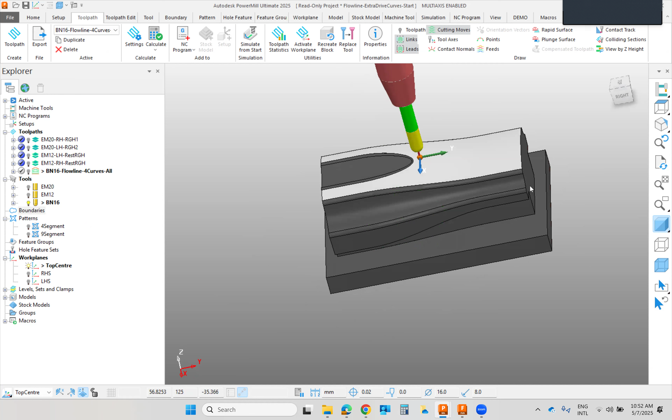First we need to extract the pattern. Pattern means the outer profile. First start profile and end profile, then center profile. Okay, what I will do, I will just select this outer profile and this one curve.

Then I'll go to pattern, create pattern, insert into model. Okay, now inside of this, I will make separately. Okay, see, we will make this first pattern, create pattern, insert into model.

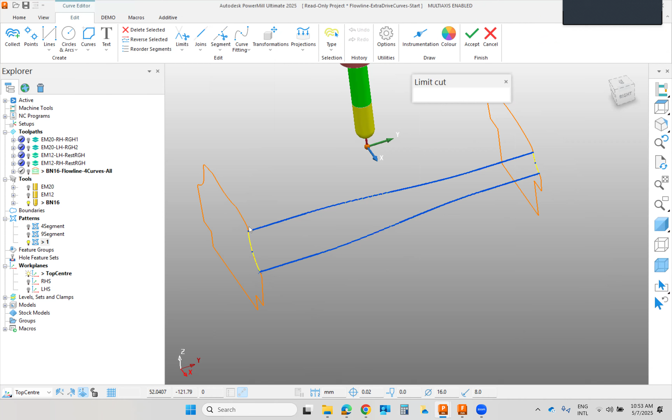But we need to edit this one. Go to edit, edit model pattern. Okay, go and you can cut it from this point and this one. Now I don't want this one. Just I will select and delete.

One start profile, one end profile, one center curve for this model. Okay, then I will accept.

You can see now, suppose I am going to do the 5-axis toolpath. What will happen? Having a multiple surface, I cannot make the toolpath. Right? Suppose I will go for any kind of surface finish or something, then it is only making the toolpath for single surface. Okay, we will not make for all the surfaces, right?

Now I'll go to flow line finish. Select this, and I need to select this pattern. What is the pattern number 1? And it should be shown as a valid.

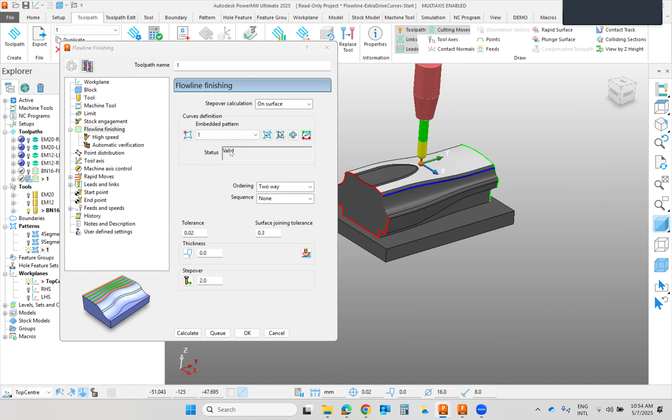Valid should be shown. Only if it shows valid, we can able to generate the tool path. Otherwise, this pattern is maybe not closed. You can see they having some error here.

Check this pattern again. Okay, they having 2 patterns. You can see, next I will try to delete one small chunk.

Now I will go to again toolpath and I will select this one. And now this is valid. And this red is indicate.

I will just click here. Red is indicate end profile. This is my start.

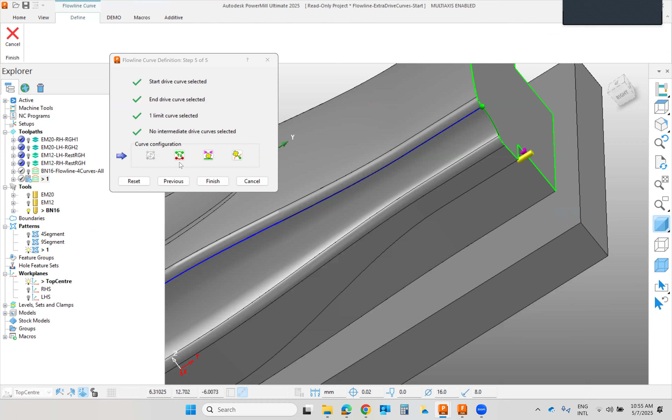Okay, and also here, it is asking we want to make toolpath inside or outside of this. Want to make outside. See, this is alternate, means this is the start profile. See the end profile, you can change also.

Okay, and this is cut direction. Up milling, down milling. And this is inner and outer. You want to make toolpath inside the curve or outside the curve. Okay, I am going to use now outside the curve.

Okay, now my tool is here. So now I will finish this. Now what will happen? It generated, selected the profile, I will change my tool axis, change my step.

And I will use the tool axis as a lead and lean. Okay, usually you are going to use vertical. You can see first one is lead and lean. And I can say having option called as contact normal.

This tool tip is always parallel to this surface. That is called as contact normal. Okay, I will use this as a contact normal. Vertical means the tool is always vertical. Okay, I will try to use contact normal.

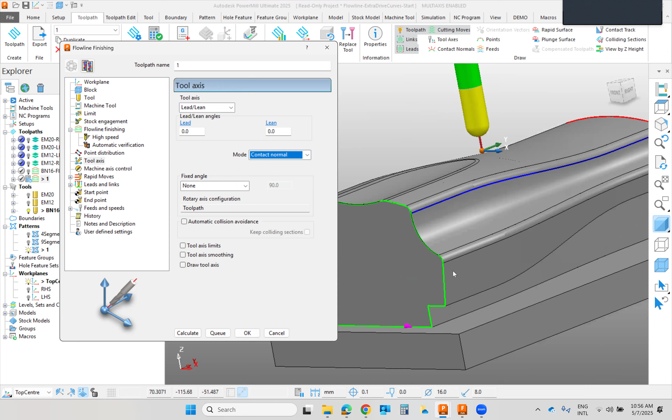Then my tool is trying to tilt on this side. Yes, parallel to surface. Always my surface is like this. The tool is always, when it is going, the tool is always adjusting. Okay, that is called as contact normal. And then I can say just calculate. Let us see how the toolpath is going to carry.

Okay, now, you don't expect the one-time toolpath in the 5-axis. You have to do some fine-tuning in the toolpath.

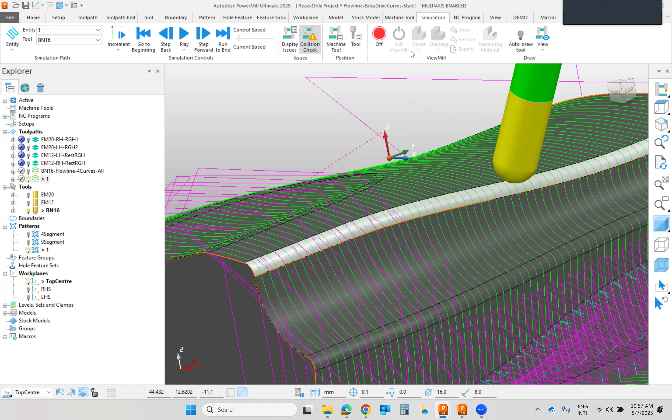You can see I have used this one, and this always contacts normal to this. I'll just turn off the lead and without it - why is it generating here also? Because we have taken the curve from the bottom of this. We need to restrict the curve, how much you want.

You can see here having one pattern curve created active. We can see the curve is created like this. That means I want to make toolpath only for this here.

What do I have to do for that? I'll just select this. Now I will select only this here. Now I will go to create pattern, insert into. Now you can see I got the closed curve.

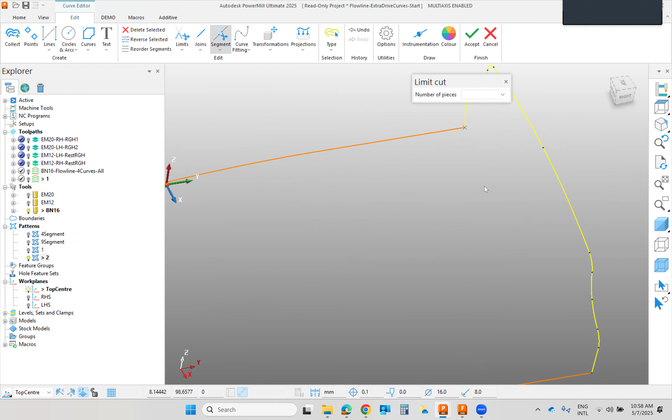See now, 0 closed, 4 open - means this is 1, 2, 3, and now I will go to the same toolpath, go to setting. Now I will change my pattern.

Now you can see this is also pattern. Now this is my start profile, this is my end profile, and this is follow. And also here having one-way and two-way.

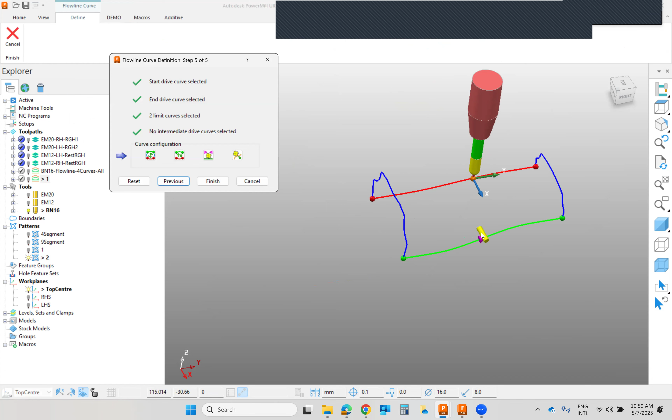Also you can see the toolpath is generating inside the surface. Then I can have here in-to-out way. Okay, I just mentioned carefully.

Now my toolpath is created. Now you can see tool is moving like this. And now making the toolpath, you can see.

Flow line or 3-axis is used. Any - that is the embedded pattern.

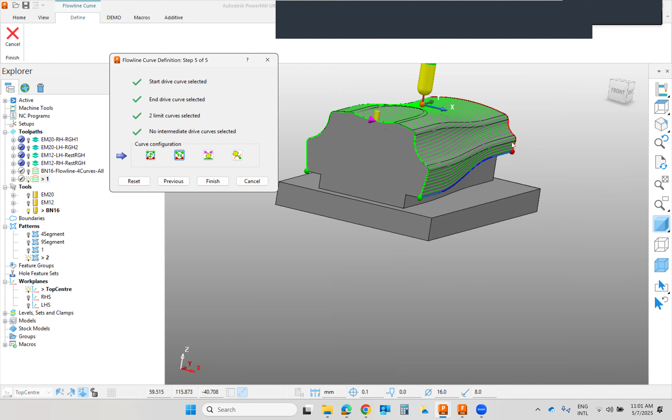See now, this is my start profile, this is my end profile, and this is my follow, and finish. Now check out. Okay, now my toolpath is generating - the complete profile is going to cover.

If you want to do like this, I can keep it as it was. Change one - just you can change it. You can see the color line, right? This, and this. Okay, so yeah.

So here you can go to edit. Here you can see this.

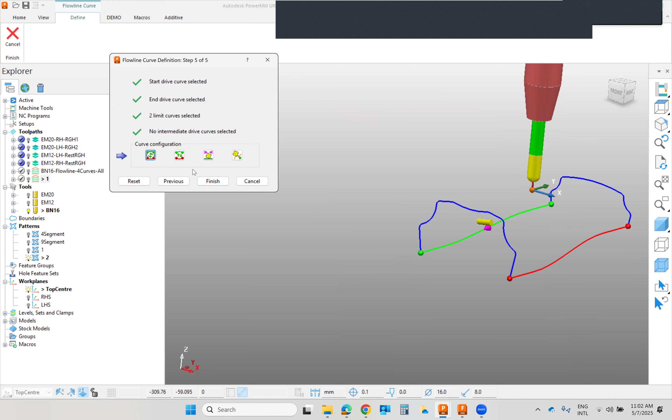What will happen now? You cannot be able to generate the full tool path. The tool is not able to reach.

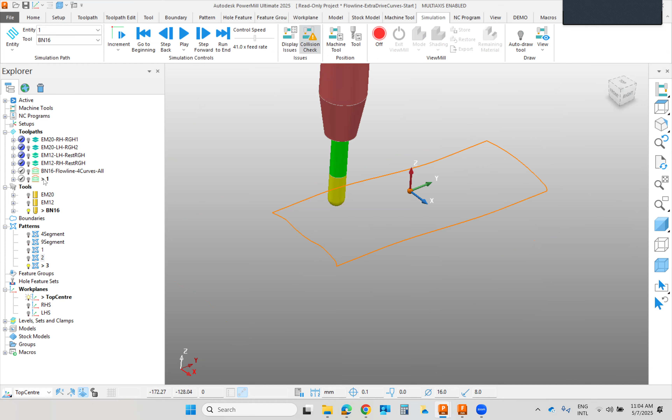Now I can go to next, same. I'll change the pattern to 3. Still valid like this, and say vertical. Vertical, yes.

Generating tool. Also, or suppose you want to generate only this, you can make the pattern only for this, and you can do it optimized, but you are having some multiple surfaces.

Stay, yeah. When you get 5-axis easy, also here you can see again. Suppose I will use lead and lean, and I will use...

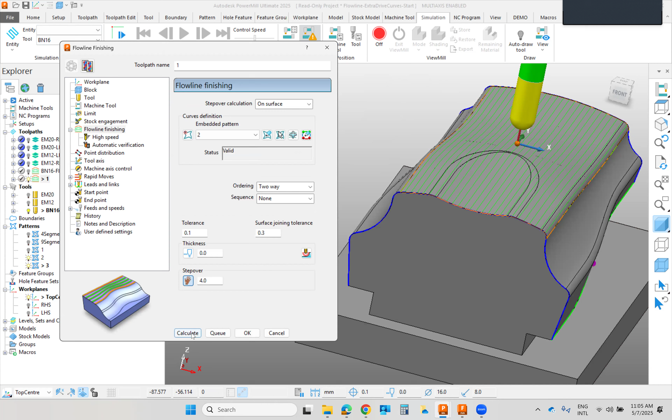And see now the tool is tilting more compared to him. It is not contacting normal to this surface.

This is another tool axis, or we can control also. Suppose I put the vertical, I can say I will tilt only 20 degrees.

Now, how much is possible in the 20 degrees? It is trying to generate the tool path. You can see now 20 degrees has tilted, instead of vertical - now you can see 20.

Or I will change it to some 35. Now it is tilted the tool path only 35. No.

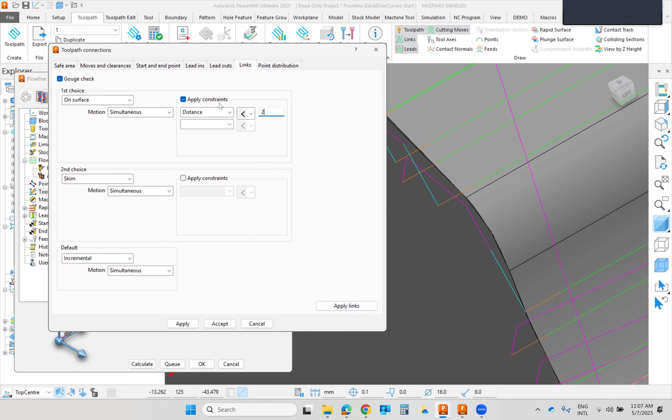This is flow line. You can use, see, suppose you want this tool path, right? In normal, you're not able to follow right on this. Suppose you're generating any tool path, it will not follow this surface. Now you want to follow the surface - this is the better option. Clear.

And I will change pattern number 4. Now I will use lead and lean and make this 0, and I'll use contact. Now what will happen? Regenerating the toolpath.

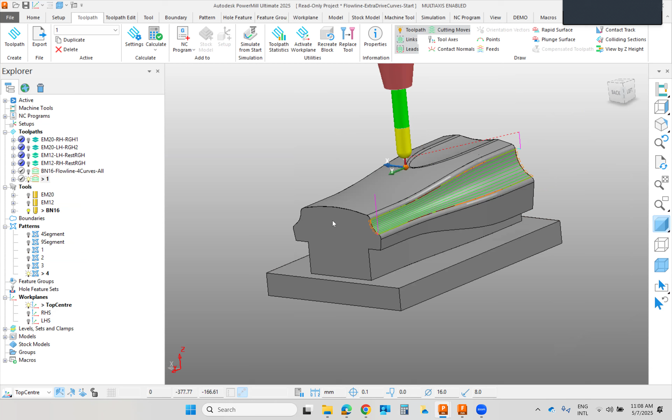Now my toolpath is generated. That means the tool is going to tilt normal. So make it better than 0 degree control. Lead and lean control.

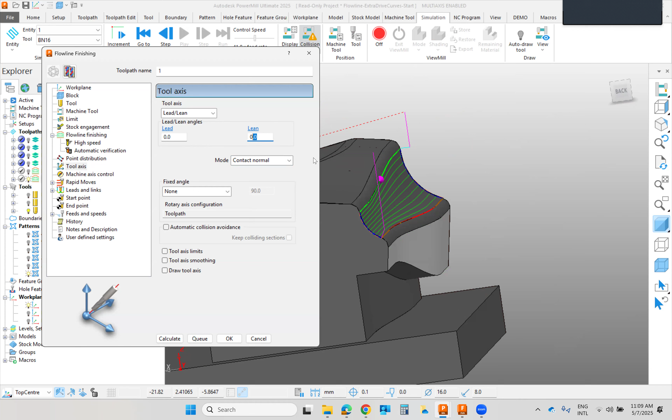Like that you can make any toolpath, any kind, but you have to extract the curve from the model. It does not take any additional curve. You have to extract it from the model. That is one restriction of this tool. You cannot modify the curve, only trim it. You cannot add a new curve also.

Sometimes there's our surface issue. You extract the curve in PowerShape and you generate the curve.

No, for this not required. What you are doing, soft finish or some other toolpath, then that is having a problem. That's why this toolpath is introduced. There is having a problem in the surface, you can use this tool. So flow line, you can just use it. Many people are using it because there is no limitation on the surface, and you can use it for 3 axis and

you can use for 5 axis. And also, it's not only using the lead and lean tool axis, you can use other tool axis also. You can use from curve also. You can use. Okay, from curve, what will happen?

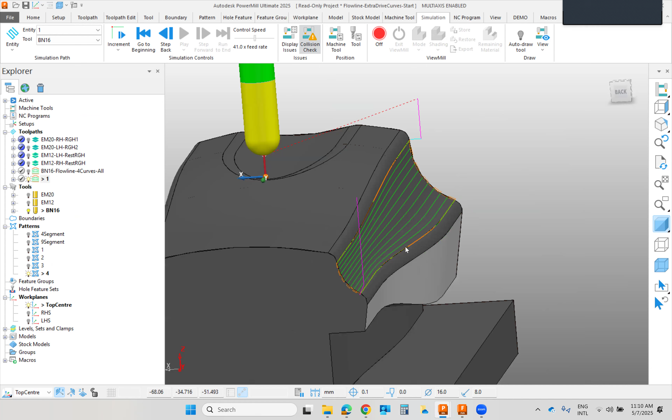Suppose my tool will always follow the curve profile. Like suppose you can see, I want to make one.

I will open the PowerShape.

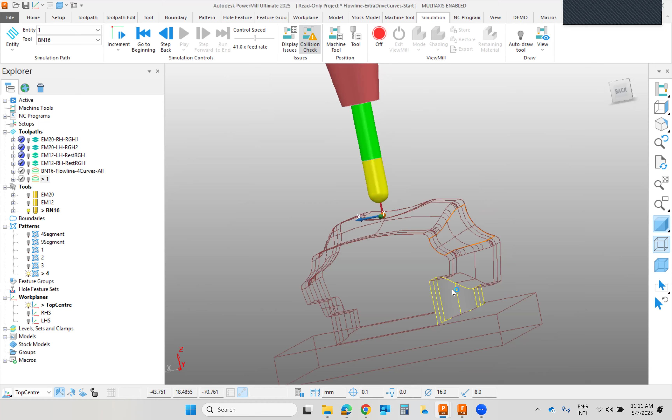Yeah, we can do in this slot because it is having a sharp right, or you have to tilt 90 degrees, you can do. Not, but this holder is going to collide here. No?

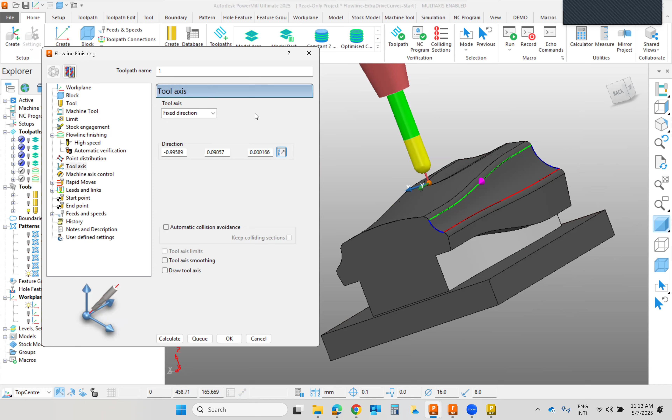You can use fixed direction. Suppose you want to use this one, I can go for fixed direction. Okay, and I can click this align to this, then. This is 3 plus 2. Fixed direction is 3 plus 2. Instead of creating the work plane, we can go for the fixed direction.

And then we can just make a pattern for this. Now I got this pattern, right? I don't edit it.

Now I can use here tool axis fixed direction, and I need to choose this align to geometry for this. It will automatically take it. I can check.

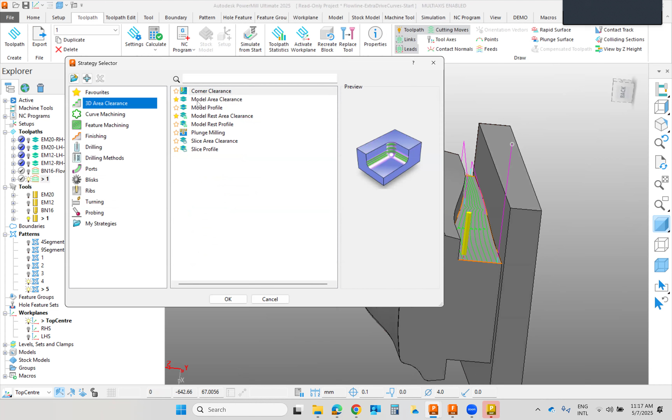Fixed direction. Okay. Hmm. And make a boundary for this.

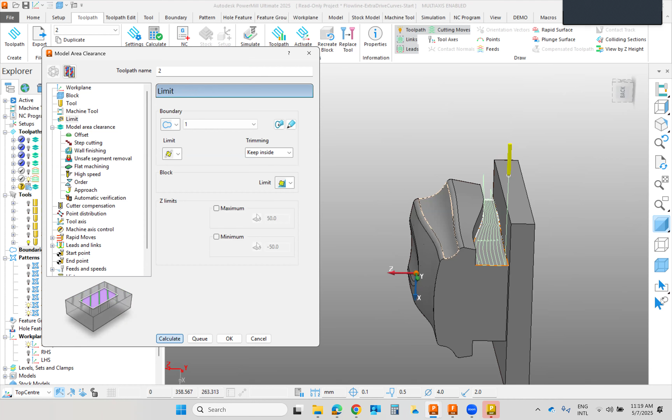Okay, only can use finishing, don't use roughing for the fixed direction. But you can finishing, you can choose any angle, and sometimes finding out this angle can be too difficult, right?

Okay, then just go to finishing, you can set angle. Go to here and you can set tool axis. Select this and say align to geometry. This is automatically taking this side direction, correct.

Align to geometry. Just click align to geometry, you can see the arrow, how the tool you want to orient. Suppose now I put like this and click OK.

Now what I will do, I will go to another toolpath. Suppose I will take raster. I want to cover this area in the raster, suppose 3+2 position. What I will do, I will make a boundary for this.

Now I will go to tool axis. I can say fixed direction, align to geometry. See how you want to tilt the tool, what angle you want to tilt the tool. So I want to tilt like this.

Or put here, accept it. This angle will come here. Right, I can use this.

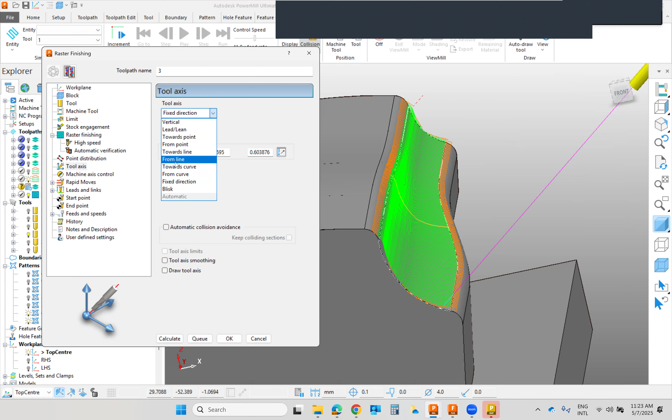Fixed. Now I will explain you from curve, and from line as well. From curve, what will happen? Suppose I told you, I will extract this, go to surface modeling.

Now just I will take one curve from here. I will make it convert to wireframe. Now this has a center curve. Just I will click, you know this wireframe, right click convert to wire.

Now this is coming here. They are having one curve, right. I will just select it, a little difficult to select, but they are having this, see.

And you can go here, create pattern, shadow. Okay, now I got the pattern.

Okay, now I will also move a little bit in the X, some 20.

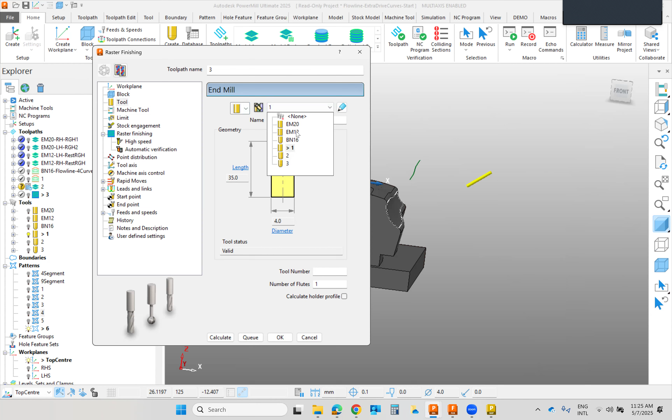Now I will just change my tool, something small. Okay, what before, what I will use here? I will use this same profile with this, before I used.

Sorry, I will not go to that, try first.

Okay, now my tool is always centered to this axis. Means I just increase the tool length to be able to understand.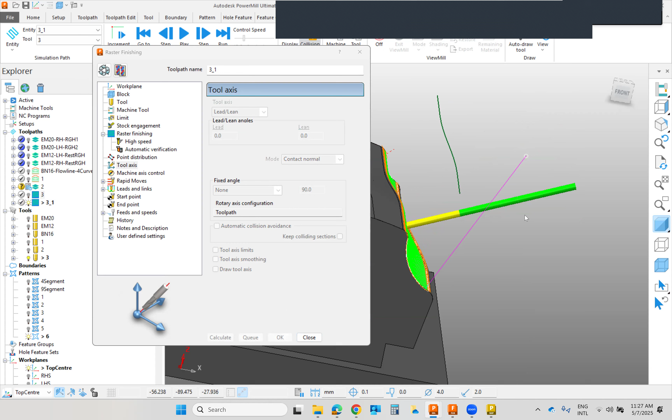This tool path is tilting as per the surface. Okay, but I don't want to tilt this much.

Then I can use my tool axis as here. See now, it is doing the machining, but the tool is not tilting, it is following this line.

You have to see approximately, because I have extracted the curve, I just put in the Z, then X. Suppose I will not move in the X, then maybe my tool axis is somewhere here, it becomes vertical, so I will move it a little bit away.

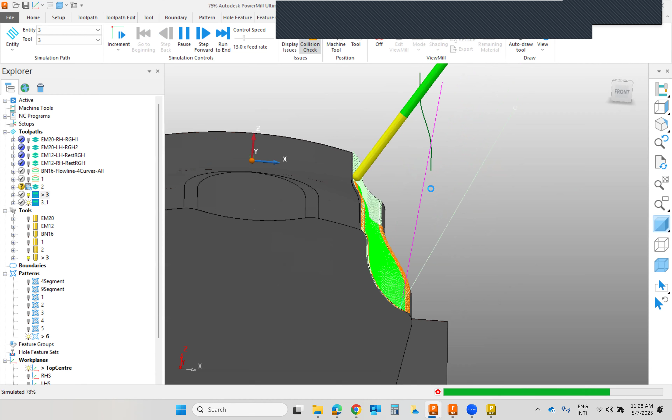Now we can see it is making it in 5 axis, but the tool is also tilting, but it is limited to that line.

You can see the same profile, we can use many tool axes. Like first I have shown lead and lean on the same, it is moving according to that one. Then you can do the fixed direction positional milling, we can use the prompt.

The curve you can make according to your requirement, how the tool you want it to build, how much you want to build. Now suppose I will just modify this curve.

Instead of that, I will just move it a little bit down. I will go to move, I will just mention 0 space minus 28.

Stop. Now my tool tilt is now changed.

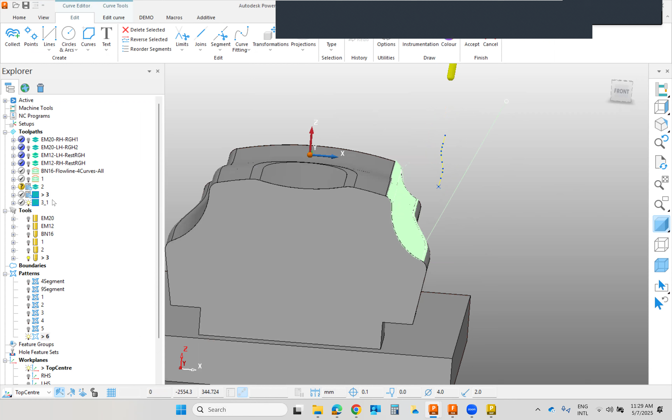Setting, I'll just again see now my tool path. Tilting is now more because this is come down. This will go more, then the tilting is less. It is following this line. The tool is better.

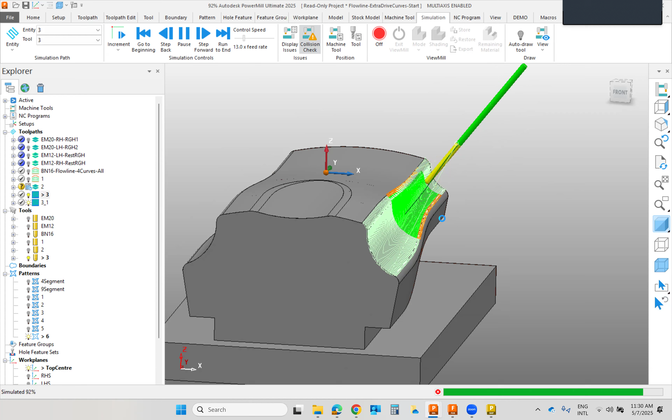Okay, I'll give some 10-15 minutes time. I have one more just to finish and you practice this.